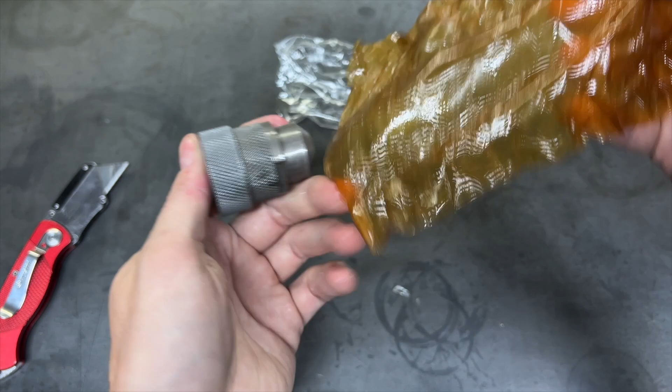This is some kind of chuck, I am assuming, for the collets. Yeah, that makes sense. It seems like a collet type of contraption. These threads are nice. It feels nice and chunky. It's obviously steel. I mean, yeah, I don't know. It feels good to me.

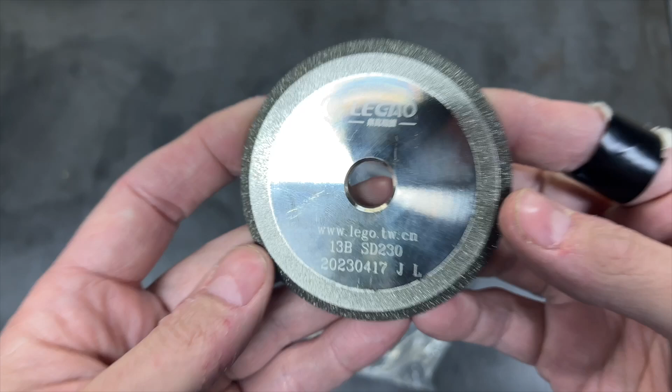I believe this should be the grinding wheel. Now, I'm no expert, but this thing feels nice and heavy, which I am assuming is a good thing. It must be made of steel. And this looks like diamond to me, so I am assuming this is intended for carbide, and that means that hopefully the wheel for high-speed steel is pre-installed. We'll find out in just a minute. Power cable, nothing too exciting here.

These are the collets. Looks like the set goes from 3 to 13 millimeters in 1 millimeter increments. So I'm assuming that this should hopefully accommodate your basic drill index that goes from 1/64 to 1/2 inch. Obviously, these are metric collets. I don't know, we're gonna have to see how well they fit with imperial drills.

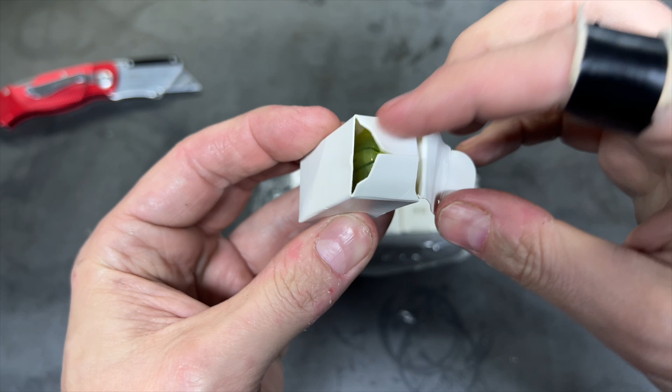It does say that they're supposed to be some kind of flex collet, so I'm assuming that they should work just fine, but we will find out. And it looks a lot like some sort of ER collet.

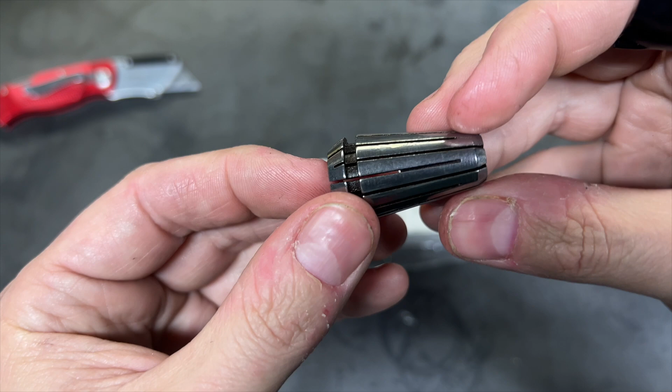So there's the unit, fully assembled, I guess, even though there isn't really any assembly required. I guess you could count that as a good thing. It's heavy, though I guess that's to be expected. There is a motor inside of here. The body is made of what looks like laser cut, stamped, and bent sheet metal, which I think is not really any surprise. I don't really know what else to expect there.

All of the important bits though, all of these pieces that are a part of the machine's actual functionality, these are all machined steel. So they're not aluminum or anything like that. All of the fits on these bores that this collet piece interacts with are all very tight. The tolerances are very close. So this one, for example, there's a nice hard stop at either end of its range of motion. There's no wobble when it's inserted in that bore. Same deal for this one, and this one up top here as well.

These tolerances are in fact so tight that you sort of have to make sure that you're lined up nice and straight when you get it started, or else it can easily just kind of get jammed in there like that. So that's good.

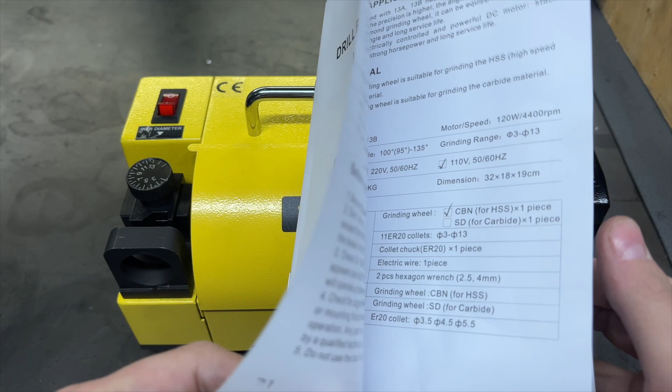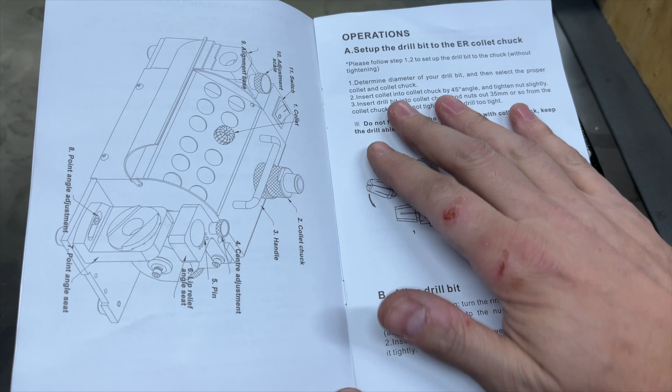I did take a minute to go over the instruction booklet, and this has to be my biggest criticism so far. The instructions in this booklet just are not very easy to follow. The English isn't very good. The language that's used doesn't always make sense. The illustrations themselves are actually pretty decent. It's just that the descriptions around them aren't very easy to follow. I think that's pretty common on these imported tools, so not really a huge surprise, but it is what it is, and that's what you have here.

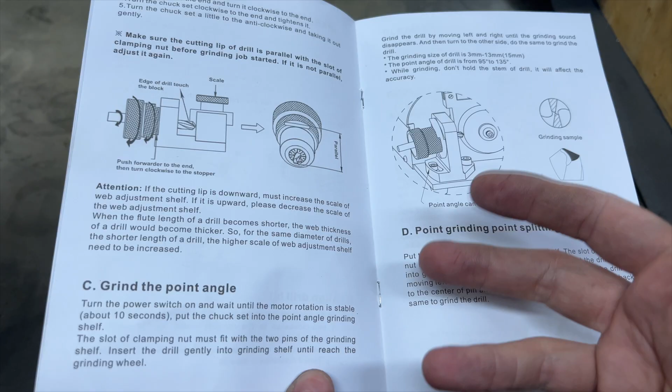The machine itself, however, does appear to be pretty simple in functionality, so just looking at it, it shouldn't be too difficult to figure out how it all works. And now, real quickly before we turn it on and test it, we'll just go over all of its major features as I understand them based on what I've read in the instruction book and kind of just figured out standing here fiddling with the thing.

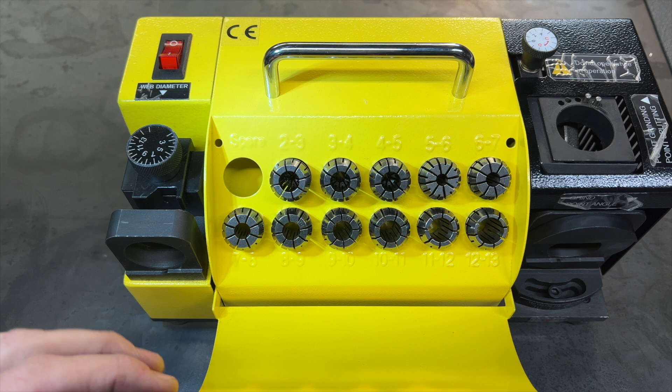We'll start with the collets. The collets are, of course, stored in this little compartment here. They are secure in their little slots. This little door keeps them safe, prevents them from falling out. They're very easy to get to. It keeps them with the machine. I think it's a nice little touch, and I definitely prefer this to just having them floating around in a drawer somewhere or something like that.

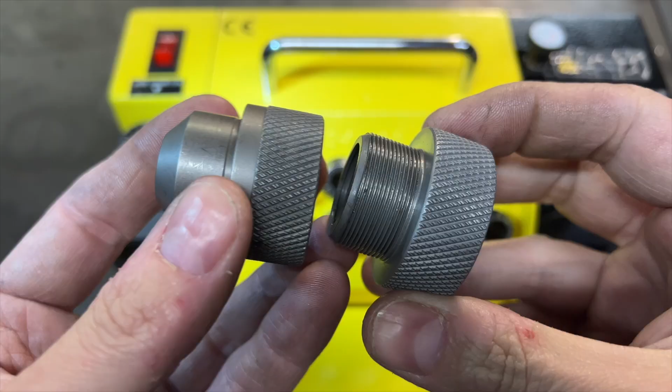Next up, we have the chuck, which is 2 pieces, or collet closer, I guess is another word for it. The threads on this are a very nice fit. I don't know if you can hear this, but they're a very nice fit, very smooth and tight. It's of course made of steel, it's heavy, it feels nice and durable, and it has a nice knurl on both pieces.

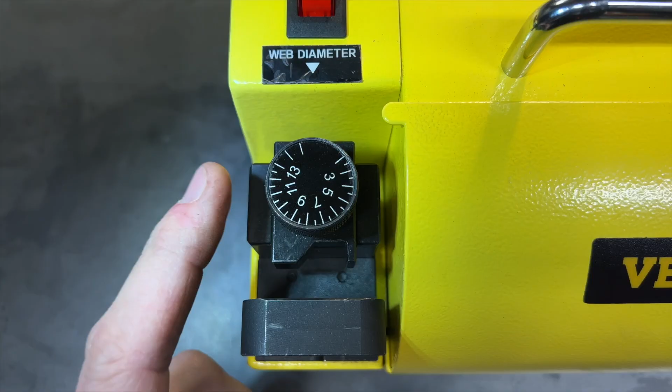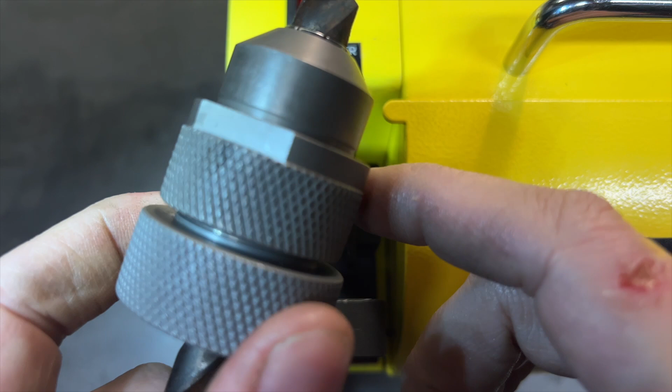Next is this thing here. It's labeled web diameter, but really what this is used for is to align the drill properly in the chuck. So this is supposed to do 2 things for us in that regard. First, it is supposed to help us make sure that the drill is sticking out the appropriate length for the grinder. Secondly, you'll notice that there are 2 flats on the chuck, one on either side, 180 degrees apart. It's also supposed to help us make sure that the cutting edges are aligned parallel with those flats.

If you look on the bottom here, you'll see this shelf with this sort of radius on it. This shelf is meant to interact with the flats on the chuck. So when you insert the chuck, the flat on the bottom of the chuck should line up with that shelf, and if it's inserted correctly, that shelf will then limit the motion of the chuck. And so you'll only be able to turn it back and forth a few degrees.

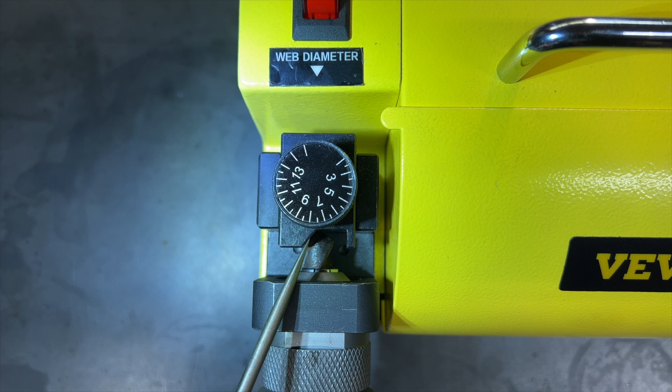Then when you look over top here, you're going to see 2 things. One, there's this back wall right back here. You're going to want to push your drill until it bottoms out against that back wall. Second is this sort of angled ledge here and this dial right here. So this dial moves this ledge up and down.

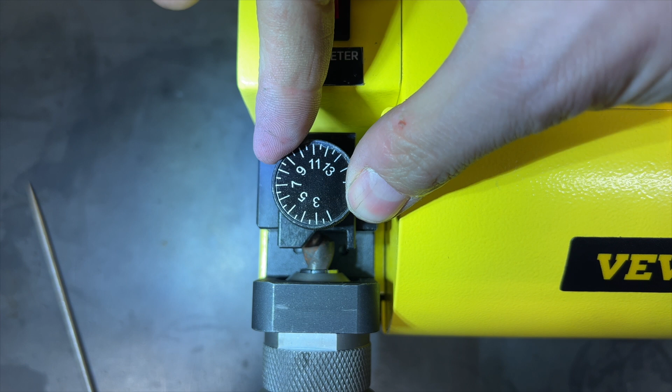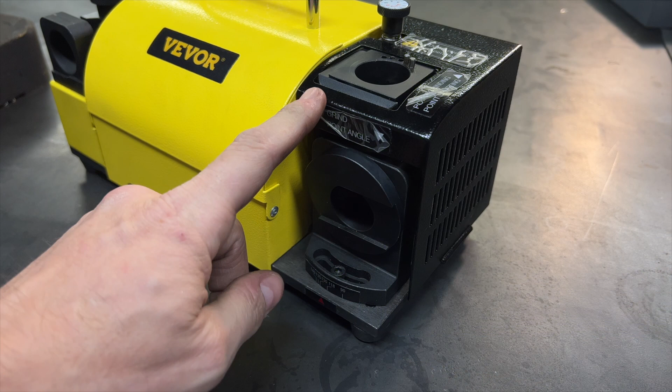What you're looking for here is for the cutting edge of the drill to stop against the bottom of this ledge. If you have it lifted up too high, the drill will be able to spin freely. So if that's the case, you just start adjusting it down until the drill stops against that ledge. And the idea here is, if it's adjusted correctly, when the drill stops against this ledge and the chuck bottoms out against the ledge on the outside, these flats on the chuck and the cutting edges on the drill should now be aligned parallel.

On this side, we have all of the grinding features. The grinding wheel is kept in this compartment here. To access it, you just loosen this thumb screw, swing this door out, and there's your grinding wheel.

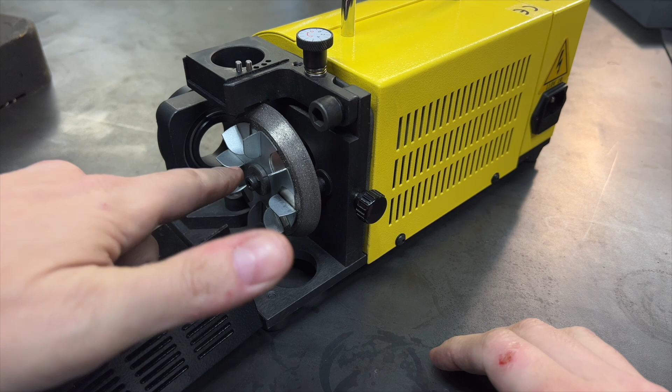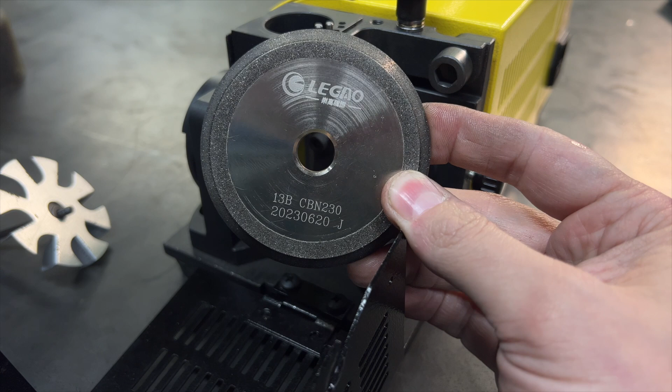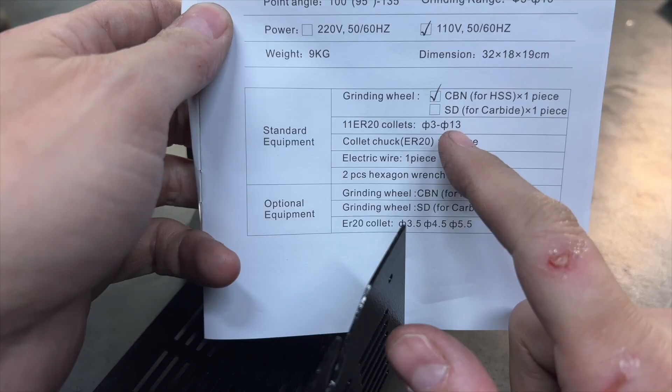So the second grinding wheel did come pre-installed on the machine, and the fit of the wheel on the arbor is again incredibly close and tight. Taking a closer look at the wheels, they are in fact labeled. So this one that came installed is the CBN wheel, and this one here is the diamond wheel. Those labels do match what's printed in the instruction book. So CBN, of course, and then SD, I'm assuming is sintered diamond or something. It's definitely diamond.

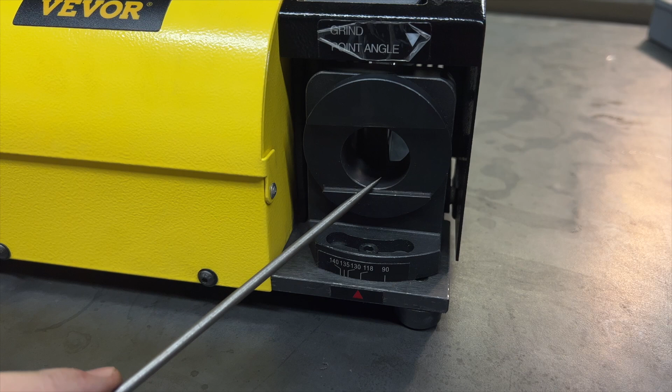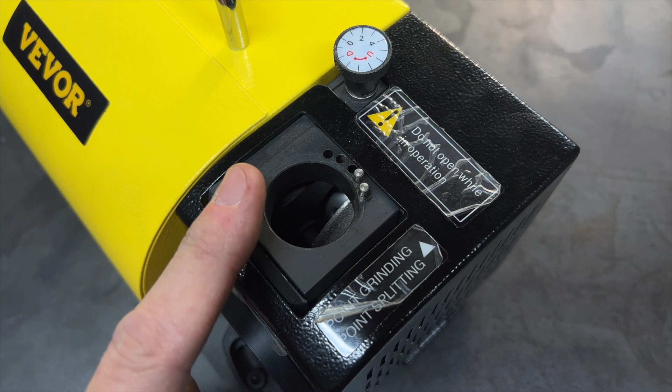This slot here is where the actual grinding is done, and your tip profile you can set from 90 to 140 degrees. To change that, you just loosen this set screw, and then this whole piece here slides back and forth. And last but not least, we have this slot here, which is used to grind your split point and the secondary relief angle on the back side of the drill.

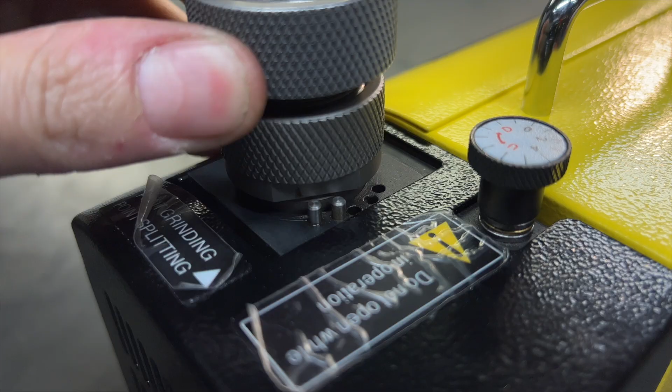The way that this works is you have these two pins here and all of these holes along this outside diameter. These pins interact with the flats on either side of the chuck. So when you insert your chuck, you'll just line up one of the flats with these pins and drop it in. And now you'll see that these pins are used to constrain the chuck using that flat.

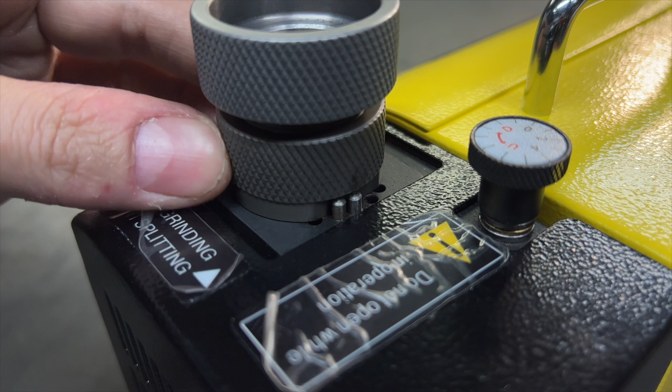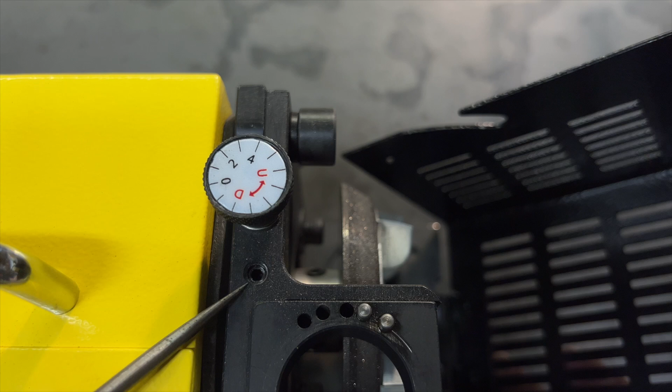And so you can see that if you move these pins to different holes around this diameter, it will change the size of that secondary relief angle on the back side of the drill. So if I move them over by one slot, for example, you'll see that it has a larger range of motion now. And finally, this knob here is used to set the depth of your split point. And there's a set screw that locks all that in place once you have your depth set. So I guess now let's plug this thing in, turn it on, and see how it sounds.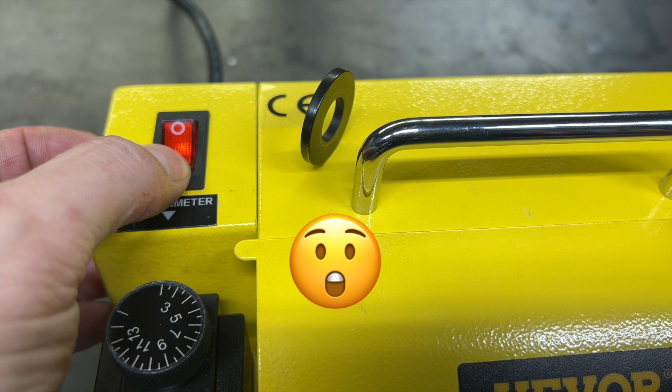All right, so now it's time to see if this thing actually works. To get us started, I have this 1/2-inch drill here. It's a little chewed up, it's nothing terrible, but we are gonna see if we can take this drill and turn it into a brand new 118-degree split point ready for use in the hobby machine shop.

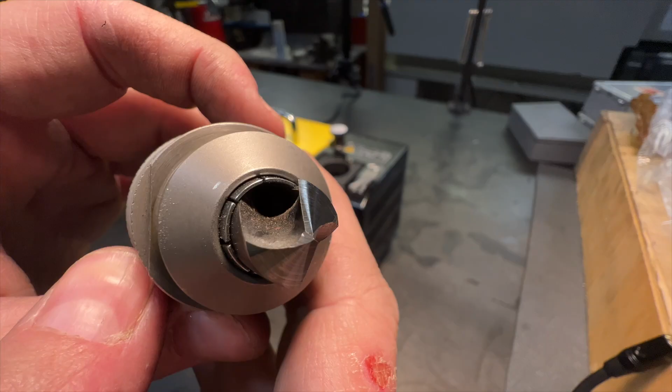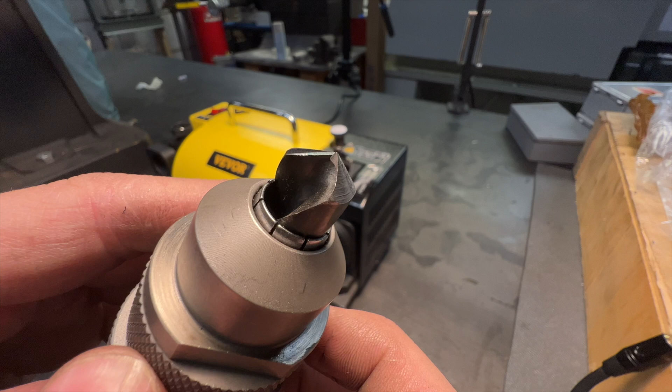All right, I had to get some more light over here so that you could see, but I think that looks pretty darn good. It definitely split the point. You can see the light just catching off of those facets on the back there, that relief angle. There's that split point. You can see it a little better there, the light catching off of that facet. It's really small, so I think what we'll do is we'll set those pins in a different position and see if that changes that relief angle at all or what that does.

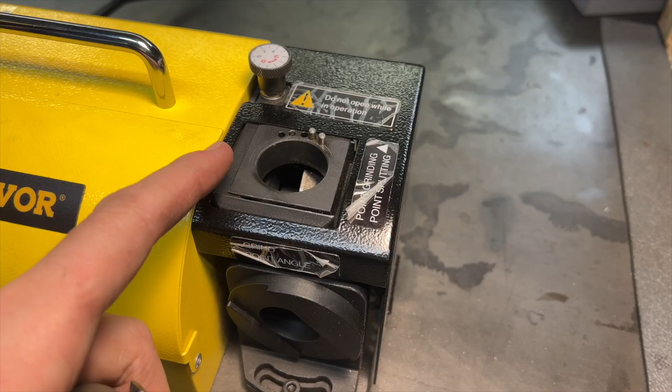But in general, as it stands right now, this looks like a pretty well ground split point drill, and it looks like it would probably do a pretty good job at cutting a hole in steel. So I think what I'd like to do now is let's take this same drill that we just ground and let's change the position of these pins. I'll just slide this one over one and we'll see what that does to that back relief angle there.

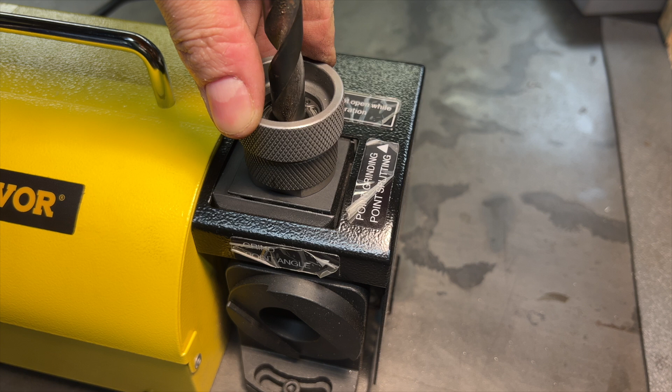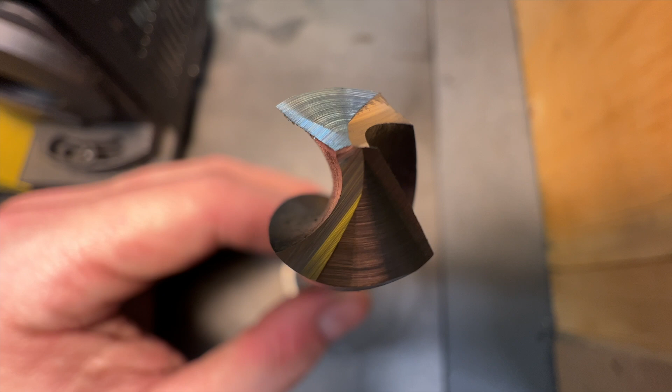Here is a much better look at that grind after adjusting those pins. You get a good shot of the split point here. There's just a very, very thin web where it meets in the middle. And now this back relief grind you can see is much wider and much longer. So it comes much further up the back side of the flute and then sweeps all the way down to sort of like the bottom of that flute. And of course it's the same deal on the other side.

So I got to admit, to me, that is a pretty good looking, pretty professional looking grind. I'm very happy with the way that that looks. So now I guess the only thing left to do is to find out how well it cuts.

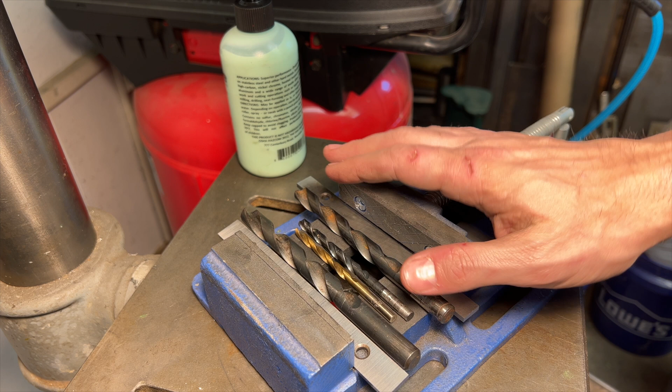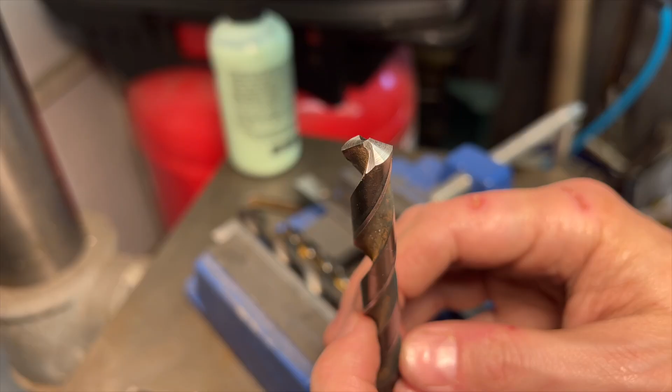All right, so we're now over at the drill press. I did go ahead and sharpen a couple of additional drills to go along with our 1/2 inch. I have a 3/16, a 1/4 inch, a 7/16, and of course the 1/2 inch drill that we sharpened on camera. They all came out great. The grinds are smooth and consistent, and at least to me anyway, they look pretty fantastic. But the question we need to answer is, do they work? And that is what we're going to find out.

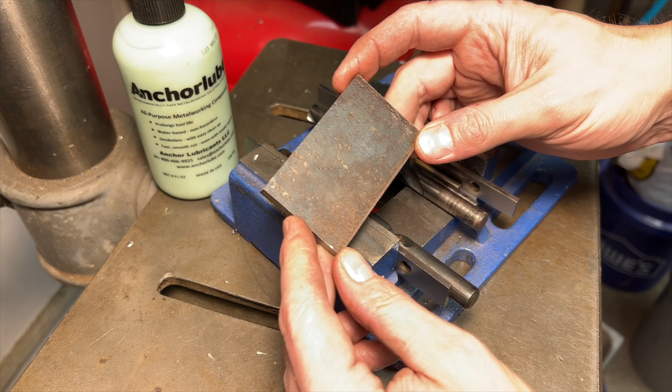I have this piece of mystery steel here. I have no idea what kind of steel it is, but I put the calipers on it. It measures just over 1/4 inch, 260 thou, and we're going to drill some holes in it. Here's the plan. We'll start with these smaller drills. So we'll drill a hole with the 3/16 and then a hole with the 1/4 inch. And then we'll use those holes as pilots for the bigger drills.

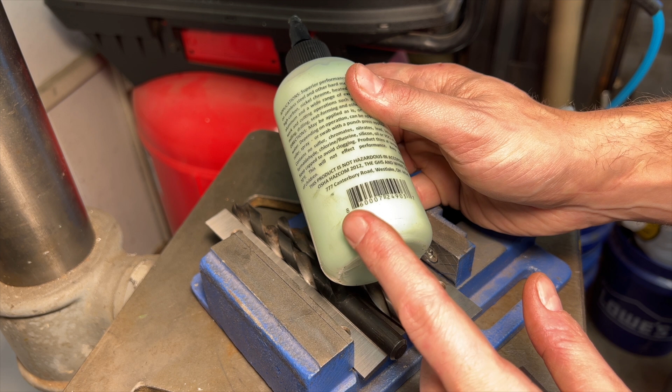3/16 will be a pilot for the 7/16 drill, and the 1/4 inch will be a pilot for the 1/2 inch drill. If we make it through all that, then the last hole that I will drill will be straight through using the 1/2 inch drill, no pilot. I'm not going to be using coolant, but I will use a little bit of lube just because that's what I would normally do when drilling a hole. And for this experiment, I just want to reproduce what I would normally do when working in the shop.

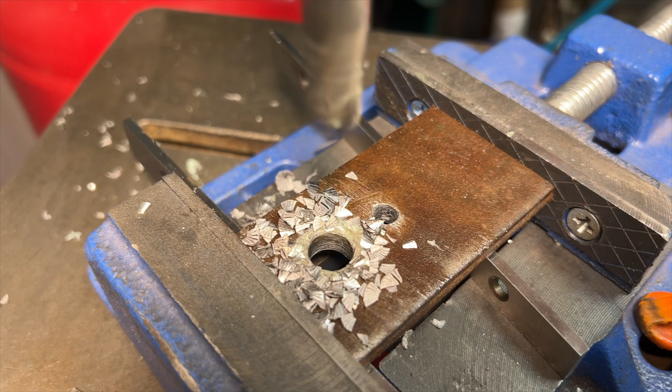And now with the 1/2 inch drill, we'll try going straight through with no pilot hole. Well, I am a complete idiot and forgot to hit record, so let's try that again. Straight through like butter, no problem. I think it grinds a pretty good drill.

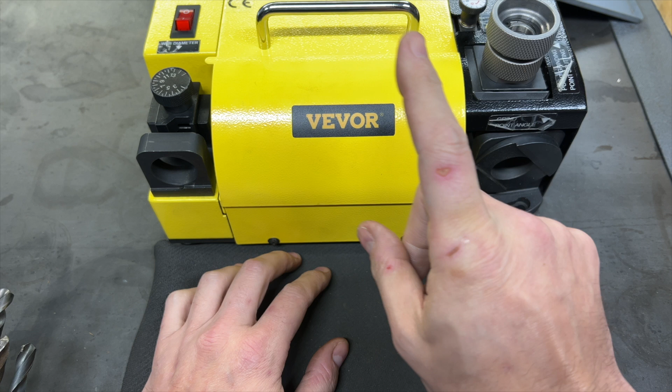Okay. I know what you're thinking. Great, it does what it's supposed to do. But is it gonna last? How's it gonna hold up over time to prolonged use? Not just sharpening 4 drills. And to that I'd say, I have no idea. What do I look like? A crystal ball?

So let's find out. What I have here is a pile of 56 drills. By my count, they could all use to be sharpened for one reason or another. Some are definitely worse than others. These 56 drills, combined with the 4 that we just sharpened, and a handful of drills that I have in my various indexes, letter, number, etc., should bring the total count to right around 75 or 80 drills, I believe.

Now, I know that 75 drills doesn't represent an entire lifetime of use. But in the hobby shop, I don't know about you, but I don't sharpen that many drills, maybe a couple here and there. Now, I'm sure there are people out there who do a lot more drilling than I do and may sharpen a lot more drills than I do. But these are the drills I have, so we're going to sharpen them, and then when we're finished, we're going to take a look at the wheel in the grinder and see how it's holding up.

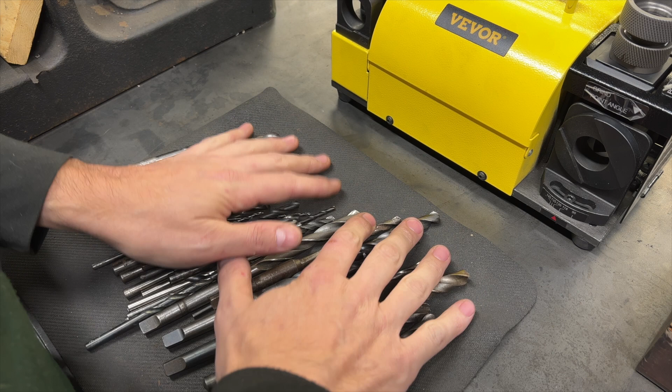The other thing that I hope to learn by doing this is what it's really like to use the machine. Like I said, it's one thing to sharpen 3 or 4 drills, but to sit down and sharpen this many drills, well, this should give us a pretty good idea of what it's like using this thing. Does it have any quirks? Is there anything annoying about it? Is there anything that's going to break after 10 or 15 drills?

Now, of course, I'm not going to make you watch as I sharpen all of these drills. I might try and get some footage, but honestly, I'm having a hard time figuring out how to make drill sharpening exciting on film. So I'll probably do most of this off camera. And I guess that's enough talk. Let's get started.

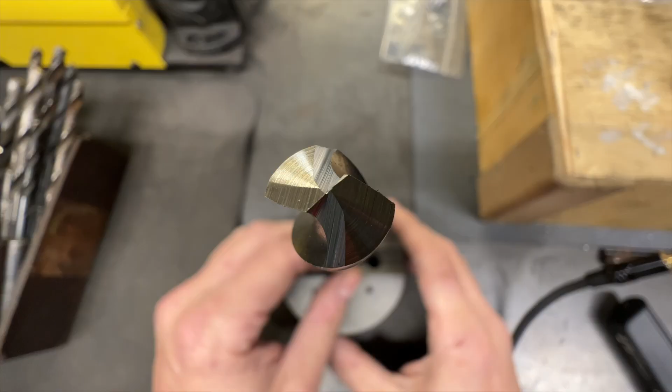Well, that's all of them, plus everything from my various drill indexes. I kind of lost count, but 56 here, plus the original 4, and there was probably 3 or 4 out of each individual drill index, so we'll call the total count 70 plus. This is the last drill that I sharpened. So look at it, it looks exactly like the first drill that I sharpened. So at the very least, I think it's safe to say that by eye anyway, there does not appear to be any significant change in either the quality or texture of the grind over the course of sharpening 70-some drills.

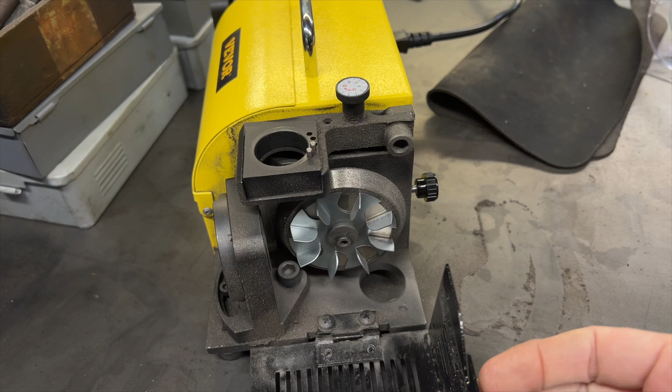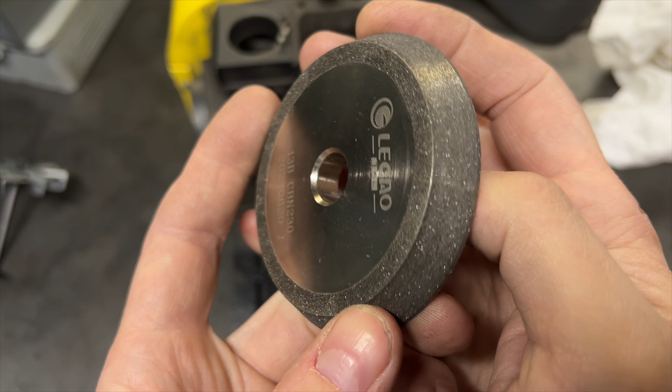Here's a good look at the wheel. I don't think that it looks any worse for wear. It pretty much looks exactly the way that it did when it came out of the box. Like I mentioned, I know that 70-some drills isn't a ton of sharpening, but I can at least say that it appears to have handled those 70-some drills without breaking a sweat, and I don't see any discernible wear on here whatsoever. I am comfortable saying that at this point, I don't have any concerns whatsoever about this wheel's ability to hold up over time to prolonged sharpening.

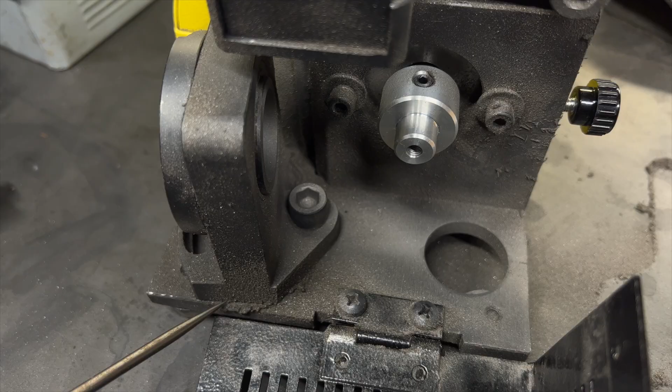There is a ton of grinding grit in this little compartment here, and it's also all over the bench as well. It does have this little hole in the compartment where the wheel is kept, and I don't know if this is intended for dust extraction, but it could certainly be used for that. And when I set this thing up permanently, I might try and hook something up to that just to pull all this stuff out of there.

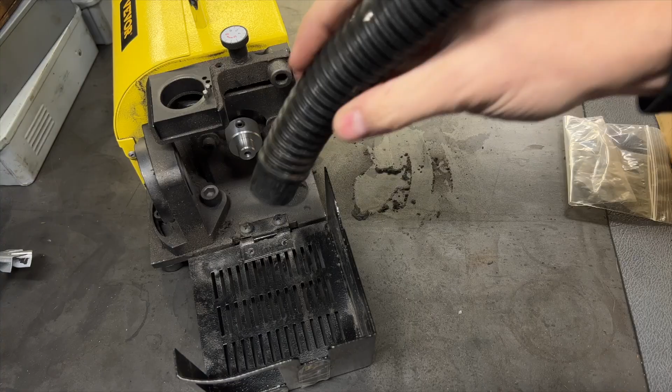And I guess that brings us to the time for final thoughts. What is my opinion of the Vevor Drill Sharpener? Do I like it? Am I going to use it? All that good stuff. So the short answer is yes, I like it. It does what it's supposed to do, and it does it pretty well.

Is it going to give you a grind that is as smooth and as consistent as a factory grind on a quality drill set? No, of course not. But it is going to give you a completely reliable, consistently ground and usable drill every single time with minimal effort and really zero thought. It's incredibly easy to use, especially once you get the hang of it, and it takes seconds to sharpen a drill. So sharpening a drill mid-project is no problem at all.

And so I guess that probably answers the next question. Am I going to use it? Yes, absolutely. This thing's going to get a permanent spot on my grinding bench just over my left shoulder, and I am looking forward to having it in the shop. Up until this point, I've had to mostly sharpen drills by hand, and I know there are some people who are really good at sharpening drills by hand. I am not one of those people, and so that whole process for me, it's hit or miss, let's just say. So having this thing is really going to be convenient, and I'm looking forward to having it around.

So what are some of its quirks, its weaknesses, its shortcomings? Well, the first and most obvious, I think, is that it's very limited in its functionality. You're only sharpening drills in this, so no end mills or any other types of cutters, nothing like that, only your drills. However, I have a hard time counting that against it for a couple of reasons. One, it's not supposed to do any of that stuff. It's just a drill sharpener.